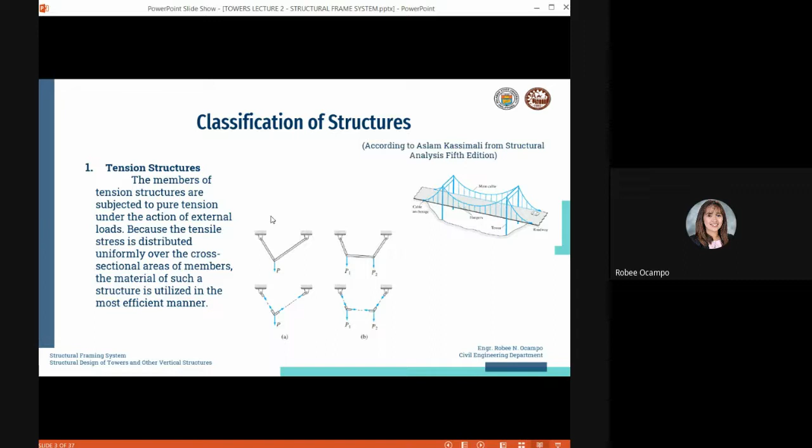So the first one is the tension structures. Next, we have the compression structures. Tension and compression structures differ in that compression structures develop mainly compressive stresses. So the difference is, one is for tension and the other is for compression. If tension structures have cables, the compression structures have arches.

The most common form of compression structures is the arch. If the cable develops tension in the structural member, the opposite is true for the arch. So whatever behavior the cable shows when it experiences tension, the opposite will be true for arches. But other than the arch, one of the most common examples of a compression structure is columns.

Columns are straight members that are subjected to compressive loads. Columns may also experience bending, or it may be combined bending and axial loading, but columns primarily behave as a compression structure, so they're mostly axial.

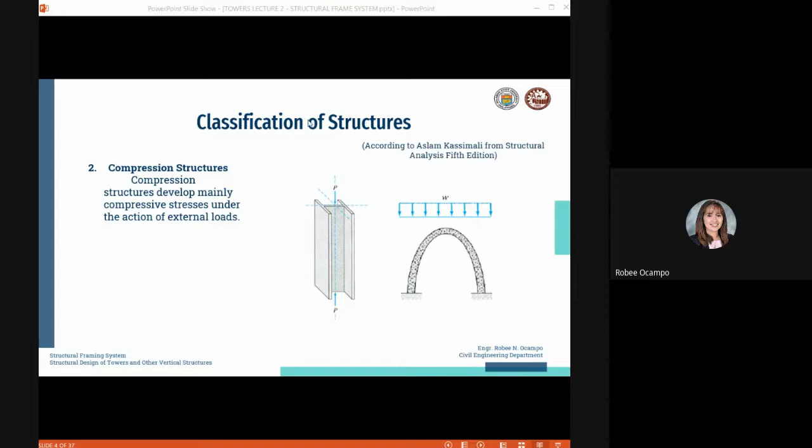Next, we have trusses. We're very familiar with the look or configuration of trusses. Trusses are composed of straight members connected at their ends by hinge connections to form a stable configuration.

Now, when loads are applied, for example P1, P2, P3, and P4, when the loads are applied to a truss only at the joints, its members either elongate or shorten. So they can experience tension and compression, but that's all a truss experiences. Thus, the members of an ideal truss are always either in uniform tension or in uniform compression. Real trusses are usually constructed by connecting members to gusset plates by bolted or welded connections.

Although rigid joints form cause some bending in the members of a truss when it's loaded, in most cases such secondary bending stresses are very small. The assumption of hinge joints yields satisfactory designs. Now trusses, because of their lightweight and high strength, since steel is usually used, are among the most commonly used types of structures.

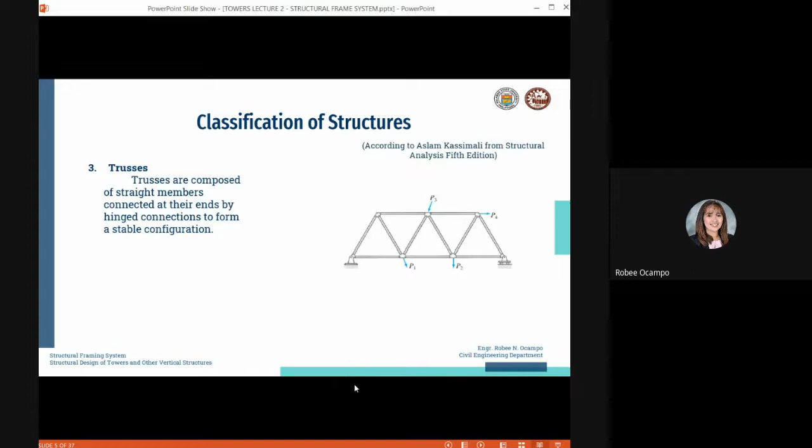Next, the fourth classification of structures are shear structures, such as RC shear walls. These are used in multi-story buildings to reduce lateral movements, maybe because of wind or earthquake excitations. So shear structures develop mainly in-plane shear with relatively small bending stresses under the action of external loads.

One of the most common forms of shear structures is of course shear walls. These are greatly used especially in tall buildings, because tall buildings are much more subjected to larger lateral loads like wind and earthquakes. As the building gets taller, the stronger its reaction to wind and earthquake.

So to resist those large lateral loads, tall buildings add shear walls to their buildings. This may be in the form of walls, or sometimes they use it as an elevator shaft, depending on the design.

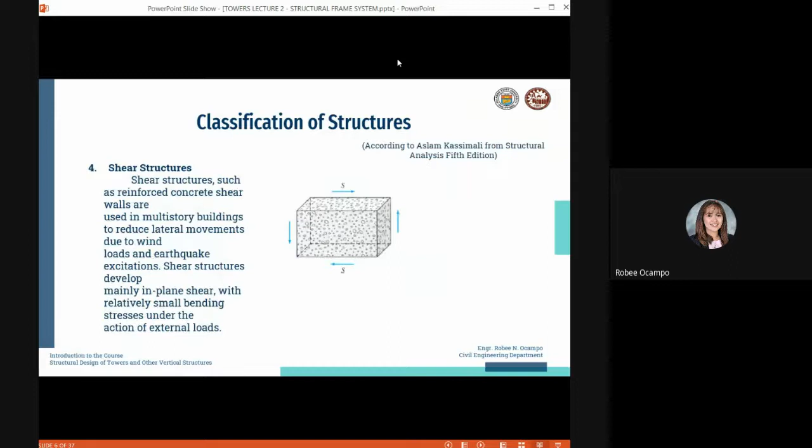So there is a fifth classification. Sorry, I haven't added that yet. Okay, the fifth classification according to Aslam Kassimali is the bending structure.

Bending structures develop mainly bending or flexural stresses under the action of external loads. In some structures, the shear stresses associated with changes in bending moments may also be significant and should be considered in their design.

The most common bending structure is of course a beam. We know that beams are structures greatly affected by flexure or bending. It may have axial loads, but these are almost negligible.

Aside from flexure, it also experiences shear because of the connections. Some of the forms of bending structures are rigid frames or moment frame systems. You also have slabs, which is also a flexural member. It acts like a beam, although it has a longer span, so it may also be considered a flexural member.

So some of the other commonly used structures are again beams, rigid frames, slabs, and plates. Unlike trusses, which are subjected only to joint loads, the external loads on frames may be applied on the members as well as the joints. In trusses, when we apply loads, it's directly on the joints because trusses don't really have bending. So the loads in trusses are at the joints only for it to experience actual load, either tension or compression. In bending structures, you can apply external load on the frame or beam within the member.

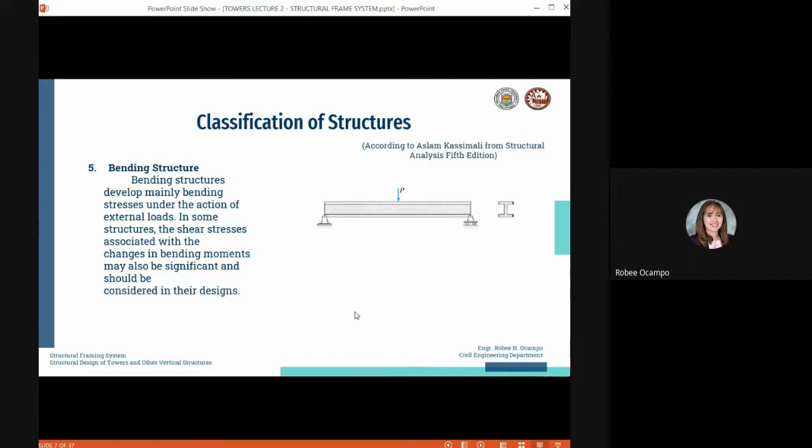So aside from these five classifications of structures according to Aslam Kassimali, I added another one, which is the surface structure. According to Hibbeler, aside from those four, the fifth is the surface structure.

When we say surface structure, this is a structure made of material having a very small thickness, while the other dimensions are very large compared to the thickness. Sometimes this material is very flexible and can take the form of a tent or an air-inflated structure. In both cases, the material acts as a membrane that is subjected to pure tension.

Now surface structures may also be made of rigid materials. Aside from, let's say, a thin steel plate, this could also be in the form of reinforced concrete.

As such, they may be shaped as folded plates, cylinders, or hyperbolic paraboloids, and are referred to as thin plates or shells. They act like a cable or arch since they support loads primarily in tension or compression with very little bending. In spite of this, plate or shell structures are generally difficult to analyze due to the three-dimensional geometry of their surface.

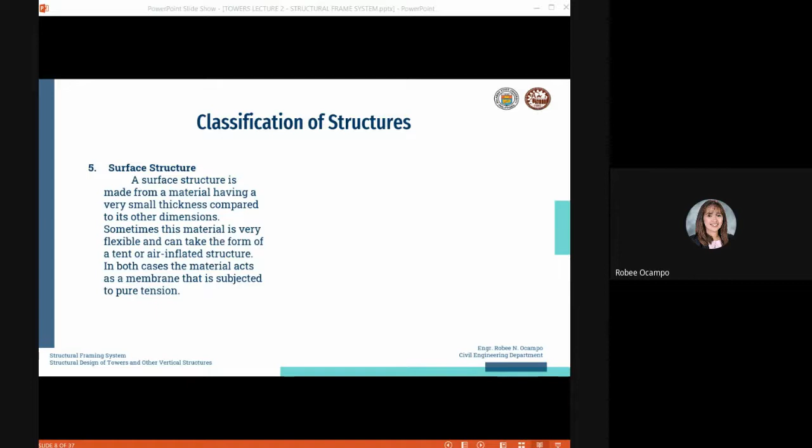So these are the basic classifications of structures, classified based on the primary stress they develop in their members. Now, because some structures are mainly governed by loadings due to lateral force, there is a framing system mainly used to resist lateral force. That's why we call them lateral force resisting frame systems.

Before we go on to the specific framing systems of towers and non-building structures, I also want to give you an idea, since I don't think some of you discussed the lateral force resisting frame systems. I would just want to give you an idea about this, though I think some of you already heard about these terms.

Now, the first main known lateral force resisting frame systems are shear walls. This is the most common form of a shear structure. A shear wall is a structural member that resists cracking through in-plane shear.

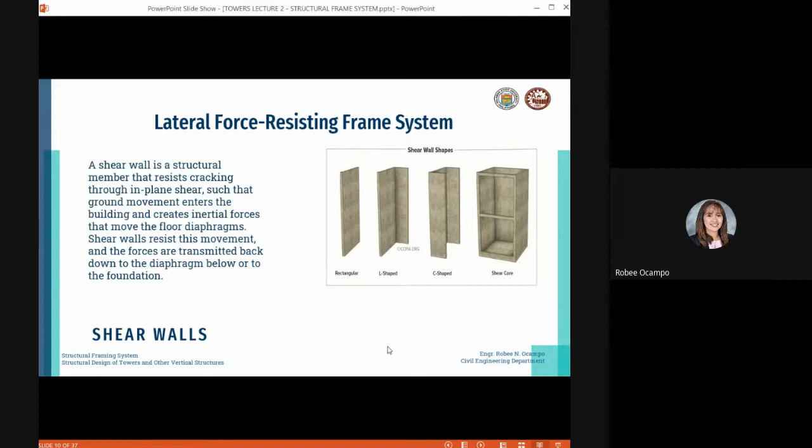Another lateral force resisting frame system is the moment frame. This is the very common and very traditional framing system, composed of vertical frames with traditional beams and columns.

For steel, they are connected by bolts or welds. For concrete, they are monolithic, meaning the pour is done together for the moment frame.

So they could have rigid connections. The rigid connection points permit the frame to resist lateral loads through the flexural or bending strength and the continuity of its beams and columns, such that moments are transferred from the beams to the columns at the connection points. A moment frame will not move laterally without bending the beams or the columns.

The three main types of connections, for steel, could be bolted or welded, and for concrete, it should be monolithic. When we say monolithic, it means the pour is done together—beam and column need to be poured at the same time for it to have a rigid connection.

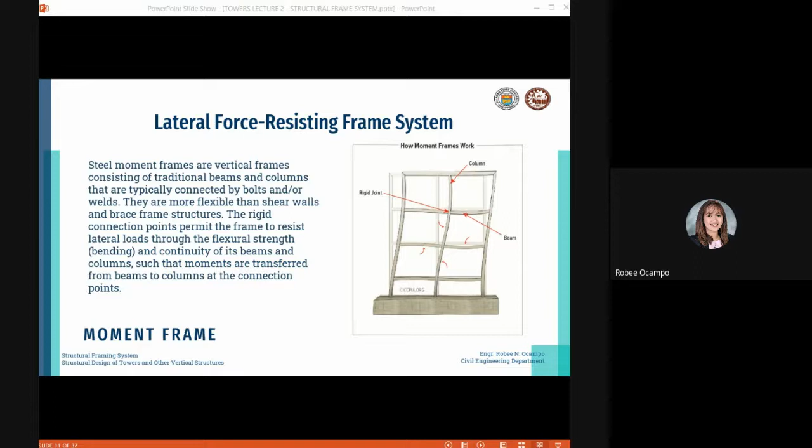Another one is the brace frame. Brace frames are most common in steel construction because they're easier to build in terms of connections. They could be in diagonal or triangulated steel beams or cables. Their purpose is to resist lateral force, and with a brace system, it could help resist larger lateral forces.

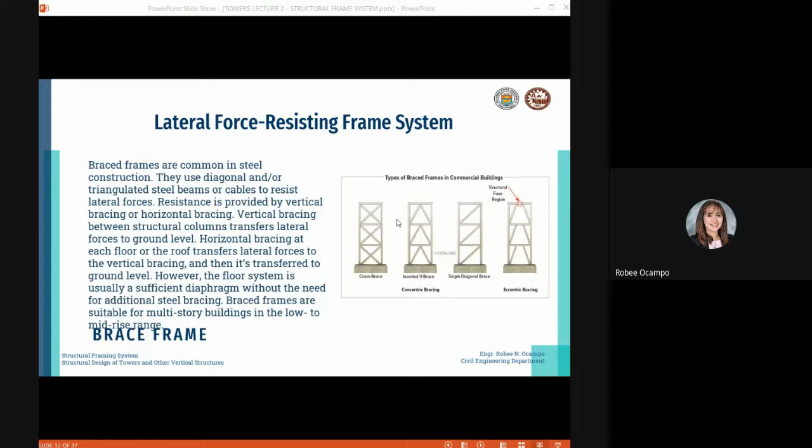Resistance is provided by vertical bracing and horizontal bracing. Vertical bracing is the bracing between structural columns, which transfers lateral forces to ground level. Horizontal bracing is at each floor or roof, transferring lateral forces to the vertical bracings. These are the most common types of brace frames in commercial buildings.

However, the floor system is usually a sufficient diaphragm without the need for additional steel bracing. Brace frames are suitable for multi-story buildings in the low to mid-rise range.

The main types of brace frames are concentric bracing and eccentric bracing. Concentric bracing is triangulated, forming a triangle—it behaves like a truss since it develops joints which act like a truss. We can only say a structure is a truss when the members form a triangulated connection. The most common type is cross brace, but you also have inverted V brace and single diagonal brace.

The other type is eccentric bracing. This utilizes diagonal braces with one or two ends deliberately offset from the supporting members. The offset is what we call the structural fuse region—the gap between the offset bracing—and it's designed to dissipate a lot of energy during an earthquake event.

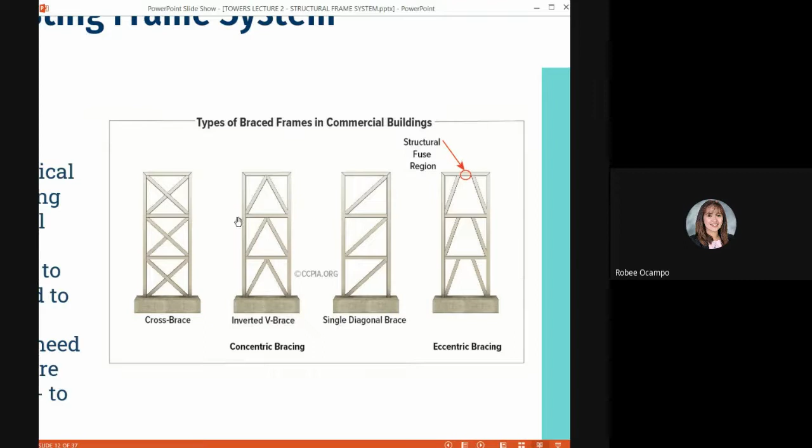Now let's go on to the types of towers. These towers are most commonly used for telecommunication towers, meteorological towers, and other sorts of towers for different purposes. These are the types of towers based on their structural actions: you have the self-supporting tower or lattice tower, and you have guyed towers, masts, or monopoles.

The most common, which you see wherever you go, is the self-supporting tower, also called a freestanding or lattice tower. Generally, its cross-section is a square, which has four legs. It could also have a triangular cross-section, which has three legs.

These towers act like cantilever trusses and are subjected mainly to wind and seismic loads. Freestanding towers are commonly used for TV, microwave transmissions, power transmissions, floodlight holding, and so on. These are usually used when the towers are quite tall.

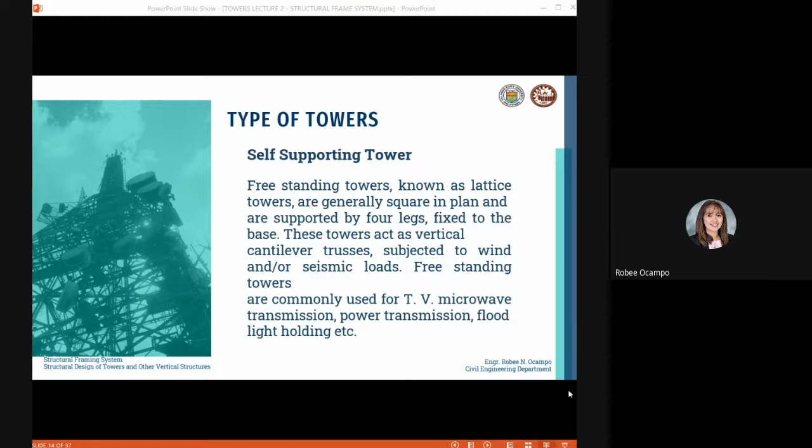Now, you have different kinds, or you have some common configurations with bracing systems.

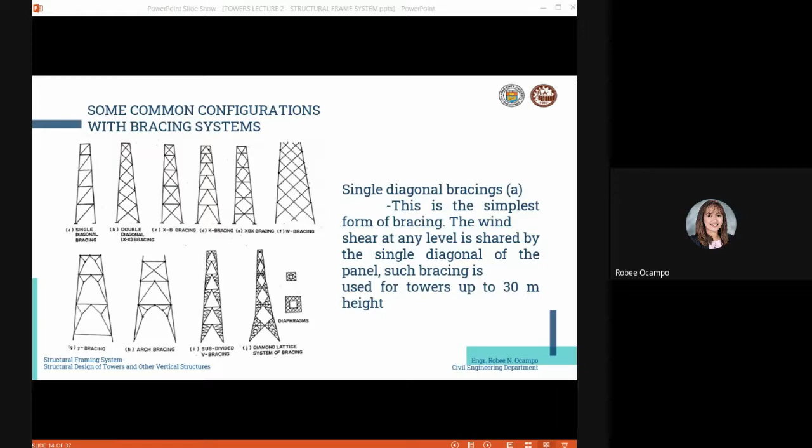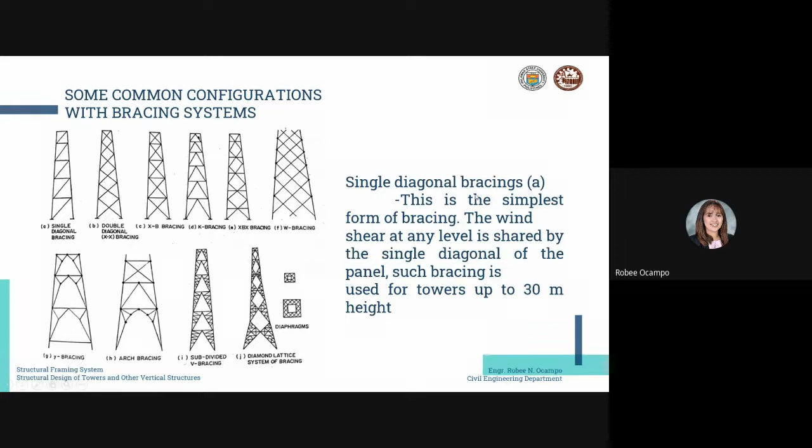The next one is the XX bracing or the double diagonal bracing. Ang pinagkaiba lang niya to sa isa, may additional na main diagonal, but this one has no horizontal bracing. So mas ginagamit siya sa mga towers na mas mataas, up to 50 meters height. This one and the first one are considered to be a statically determinate structure, so this could be computed using the basic equations.

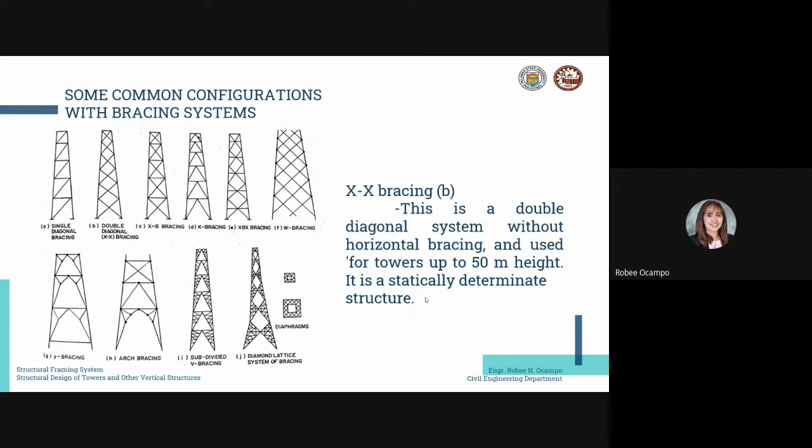The next one is the XB bracing. Pag sinabi natin XB bracing, meron kang double diagonal with horizontal bracings. Such bracings are quite rigid, so pwede siyang gamitin up to 50 meters height. But comparing to the second one, to the double diagonal, this XB bracing is statically indeterminate, so the horizontal members and redundant members can carry only nominal stresses.

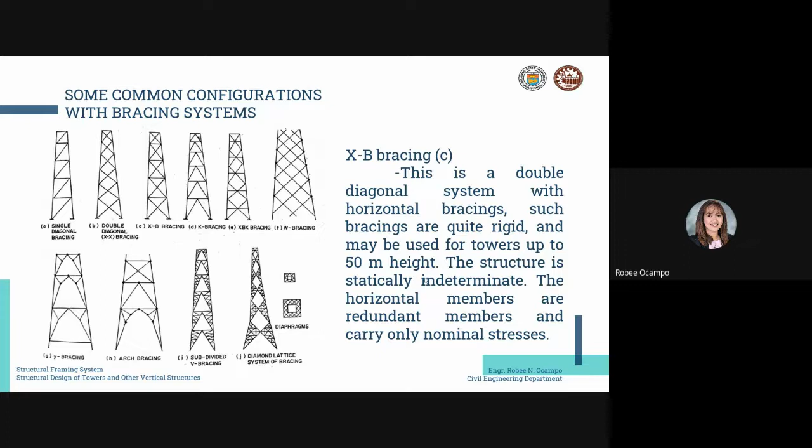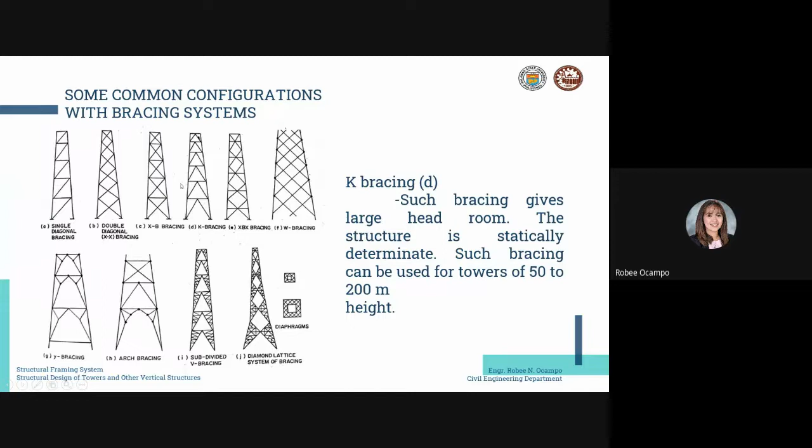The fourth one is the K bracing, the figure D. Such bracings give a large headroom. Again, this structure is statically determinate, like the first two, and this could be used for 50 meters up to 200 meters in height.

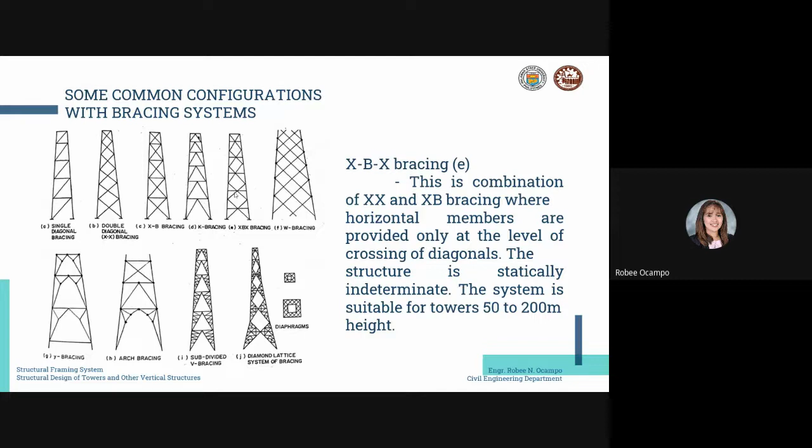Sa fifth naman, you have the XBX bracing. This is a combination of XX and XB, meron kang double diagonal na may horizontal, so meron kang horizontal and double diagonal. Although compared dito sa XB, iba yung configuration ng kanyang diagonals, na it has also crossing of diagonals. So this configuration is a statically indeterminate structure, pwede din siya to 50 up to 200 meters in height.

The next one is a W bracing. The system uses a number of overlapping diagonals. Compared to the first five, except the fourth one, mas marami yung overlapping ng structures nung diagonal members niya. Again, this is also statically indeterminate, but however, the effective length of the diagonals is reduced, so the system is quite rigid also, and this could be used for 50 to 200 meters of height.

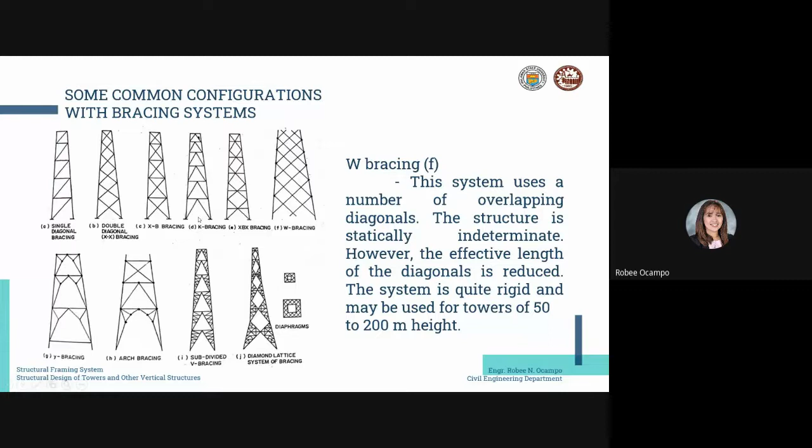Hindi ako masyadong nakakakita ng mga ganito klase, yung isa sa mga popular talaga is yung the first five. The next one is the Y bracing.

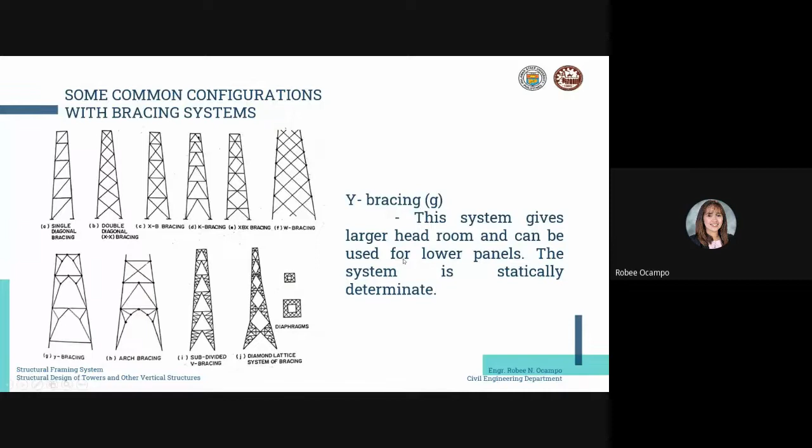Y bracing also gives a larger headroom and can be used for lower panels. This system is also considered to be statically determinate.

The next one is arch bracing. This is adapted for wider panels, has greater headroom, and the system is also called statically determinate.

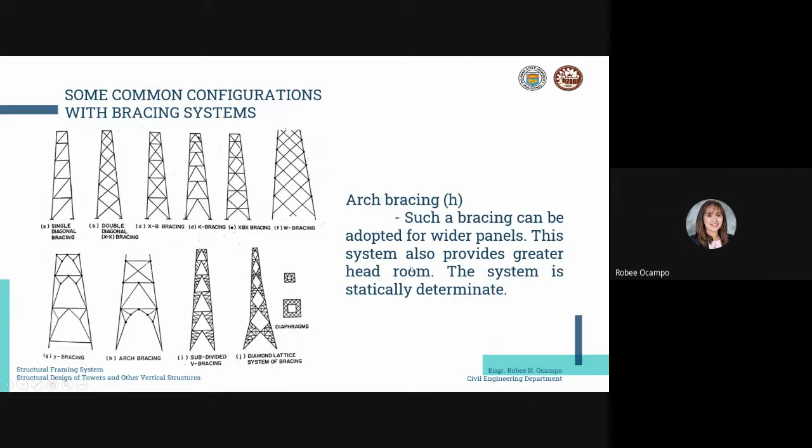The next one is subdivided V bracing. This is more used in tall communication system towers, like radio and TV towers, because they carry heavier loads. Aside from resisting lateral loads like wind and earthquake, they are also subjected to larger gravity loads from the antennas, like microwave antennas.

Antennas range from smaller sizes of 500 millimeters in diameter up to 3 meters in diameter. Of course, with larger diameter, they are also heavier. So if they are placed on towers, the ideal bracing for that is subdivided V bracing, which is why it's more used in communication towers, TV towers, and transmission towers.

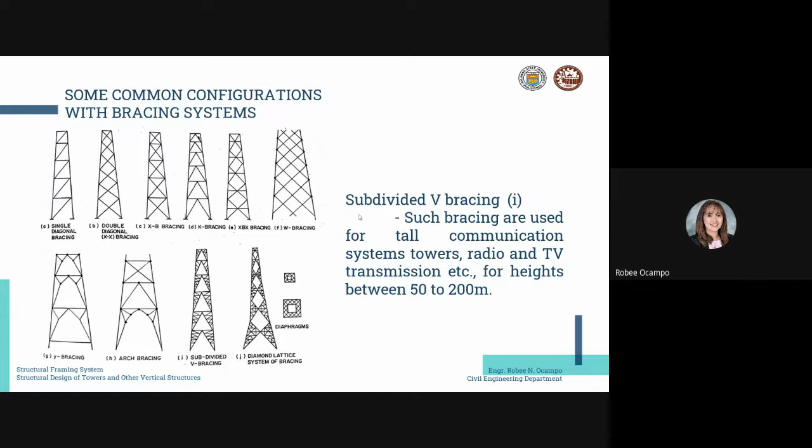Lastly, you have the diamond lattice system. The typical diamond lattice system is used for towers up to 100 to 200 meters in height. The base width is kept at 1/5 to 1/6 of the height, so it's more common in taller towers.

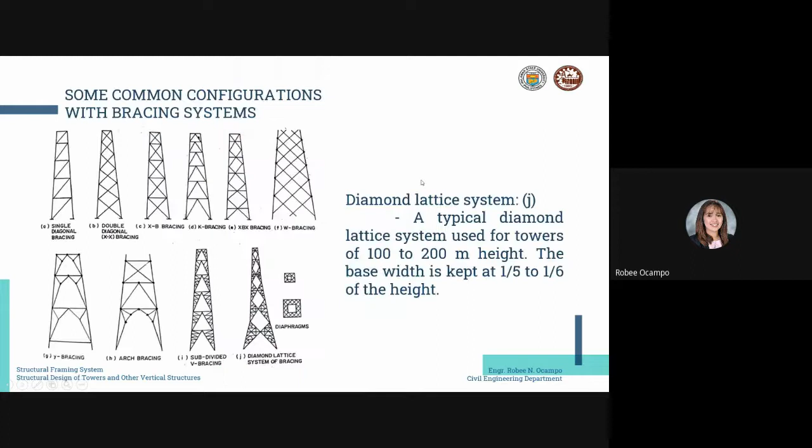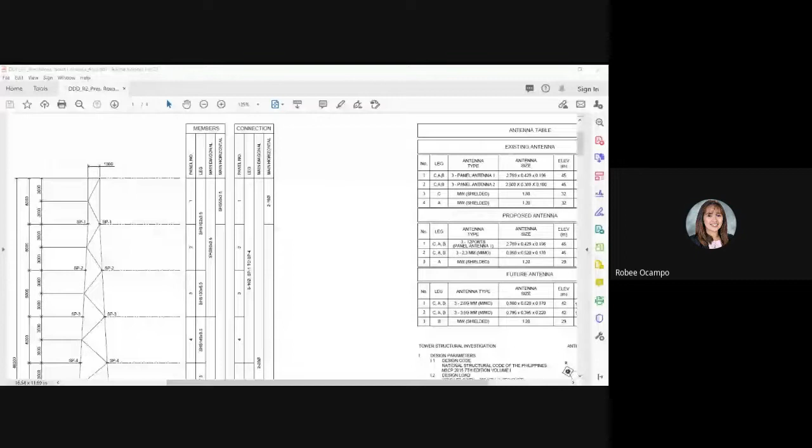I'm going to show you an example of a plan. This is an example of a plan by Smart, situated in North Cotabato, Roxas, North Cotabato. This is a 48-meter lattice tower.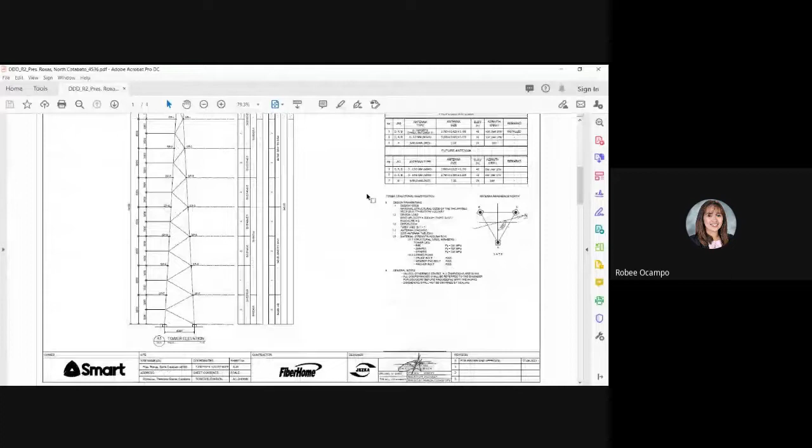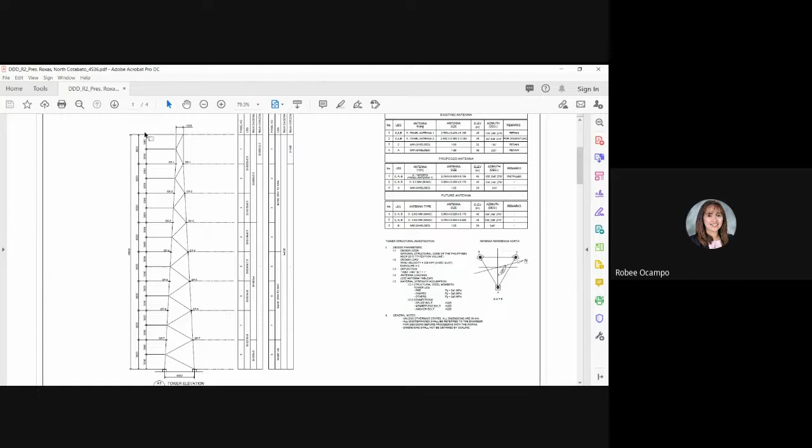The front part of the structural plans for towers is already the tower elevation. Beside the tower elevation, you also have the table of the steel members used. Aside from this, for the dimensions, you also have here the labels for its sections.

Earlier we mentioned the panel number. When we say panel, this is a group of members. It could have uniform height of panels, or the height of each panel could vary, depending also on the design of the structural engineer.

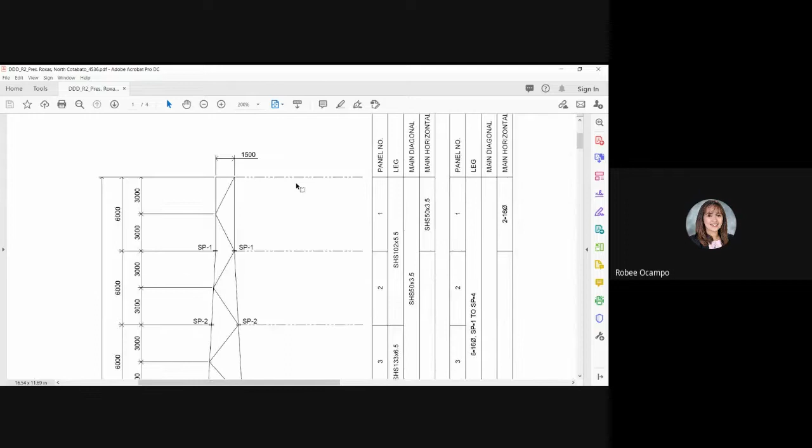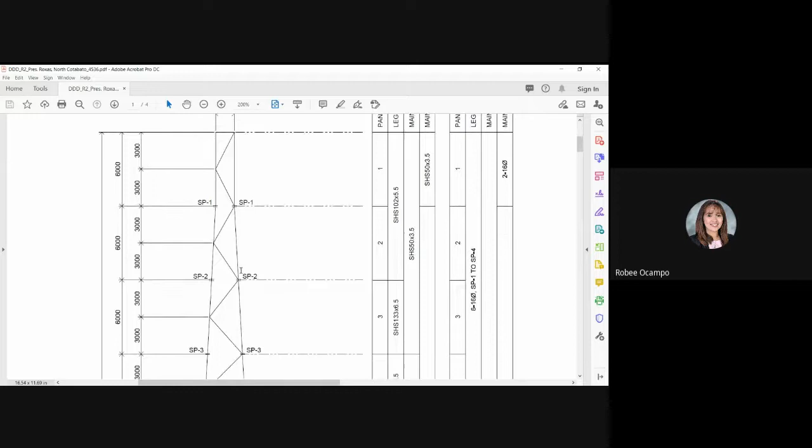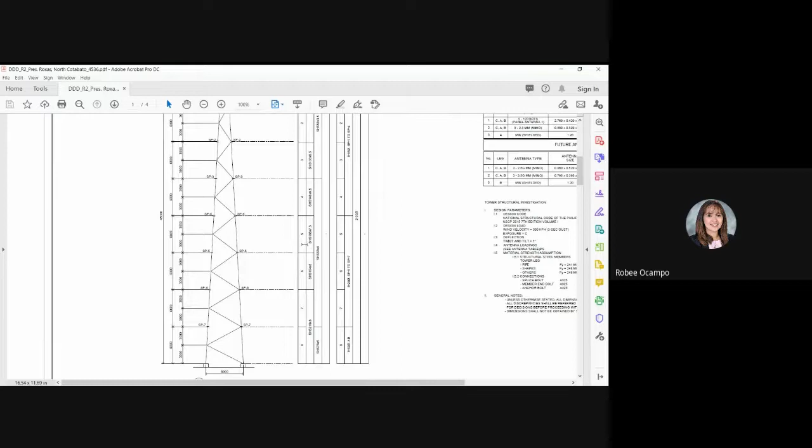I haven't mentioned earlier that usually, the design for bracing configurations is not strictly one bracing system or configuration. Usually it is a combination. So going up, you could have single diagonal bracing for the first fifteen meters, then going down, it could be different -- it could use subdivided V bracing or X-V bracing. It depends on the design.

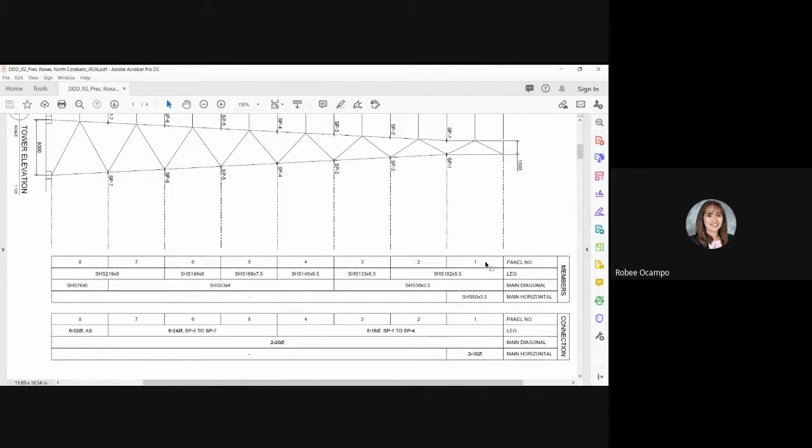Let me rotate this so you're not confused. Here in the table, you have the different panel numbers from 1 to 8, grouped accordingly. We also have what we call the 3 members: the leg, the main diagonal, and the horizontal member.

So the leg, of course, is this one -- it's on the side, I just can't highlight it. Oh, maybe I can highlight it. This one -- oh, it got highlighted. But anyway, can you see my cursor, my mouse? No? Okay, anyway.

So the leg that we call is this one. This is the main member -- it serves like a column in a building. This is the main member that distributes the load from the bracings and delivers the load to the foundation.

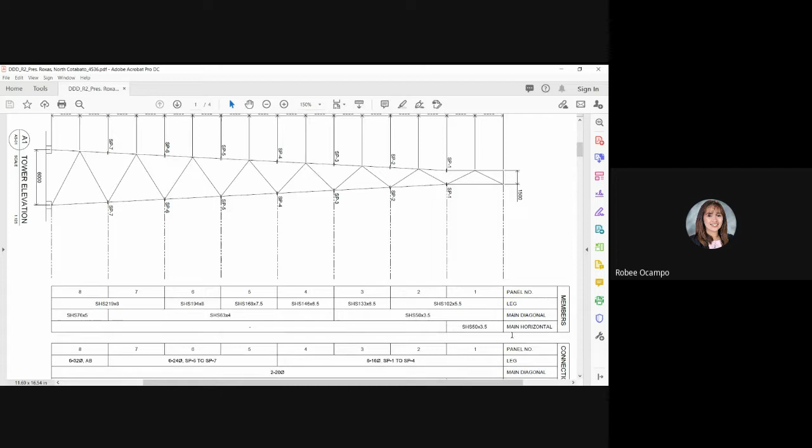We also have what we call the main diagonal -- of course, the diagonal members. These are what we call the main diagonal. And there are also main horizontal members.

Looking at this plan or tower elevation, only one main horizontal is written, in panel number 1. This is at the very top, at elevation 48 meters. Looking at the table, no other steel section is written for the other panels because there are no other horizontal members there.

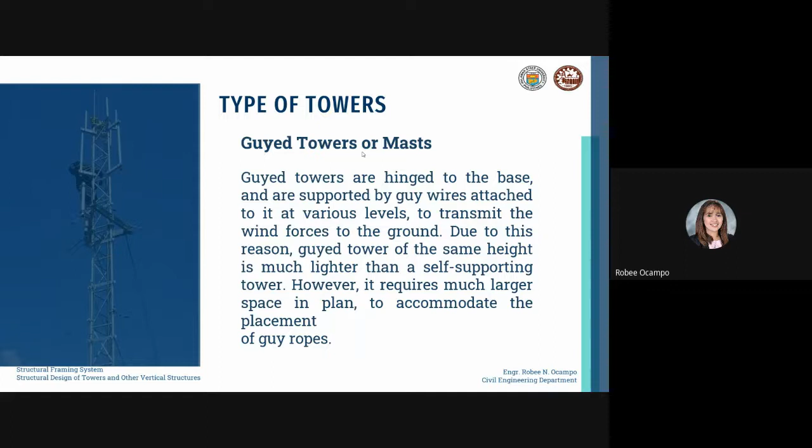Okay, so pag sinabi nating mast, it is like a column, but it is in the form of a truss. It is situated with truss members, like this one on the picture. So this is a guyed mast.

Pag sinabi natin guyed mast, usually ang cross section could be triangular or square, pero pinaka common na cross section ng mast is triangle. Pag towers naman, pag sinabi natin guyed towers, this could be a single member, or pwedeng kumbaga like for example a tubular tower lang siya, with guy wires. This could also be called a guyed tower. So any tower that is supported by guy wires is what we call a guyed tower or guyed mast.

So the common parts of guyed mast are, of course, the foundation. So meron kang steel mast, ito yung mast or yung tower, pinaka main tower niya. This could be a pole or a mast, and it is assumed to be a pin connected, so it generally has a pin foot.

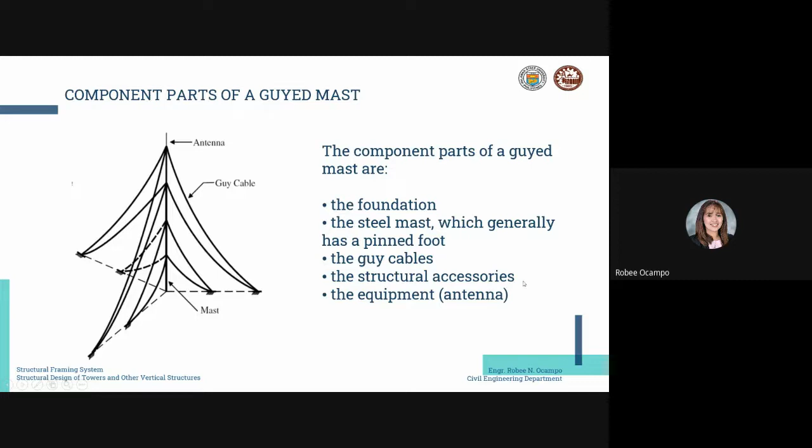Okay, now you also have guy cables, the main component. Kaya nga siya tinatawag na guyed mast o guyed towers because of the guy cables. Aside from the guy cables, you also have structural accessories like the connection or bolted connections, or different appurtenances, and of course the equipment or the antenna, yung pinaka gravity load aside from the self weight ng ating towers. So this is an example of a structural detail for steel mast.

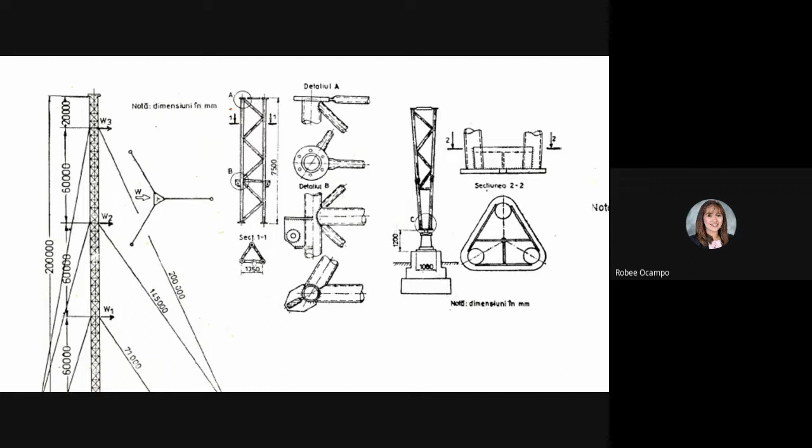Makikita nyo, again, sabi ko nga kanina, isa sa mga common cross section niya is a triangle, di ba? So you have here the cross section of your mast. So this is the main horizontal member of the mast. And looking at the elevations, this has also main diagonal, that's why it also acts like a truss.

So for this sample of guyed tower, you have guy cables or guy wires situated in different or various levels of the tower. You have guy wires connected every 60 meters of the tower. The total elevation of the tower is 200 meters. So for every 60 meters, there's a connected guy wire.

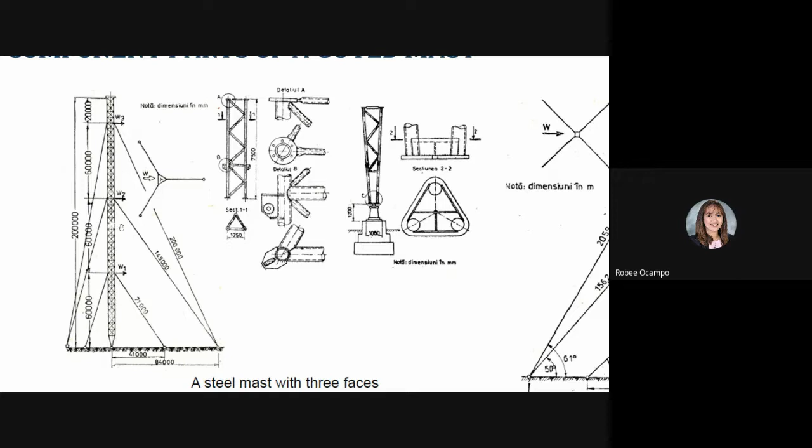The guy wires are placed in 3 directions - one in front, one on the side, and one in the back. For the connection, usually one of the common methods is bolts or weld, or it could be a combination of bolts and weld connections.

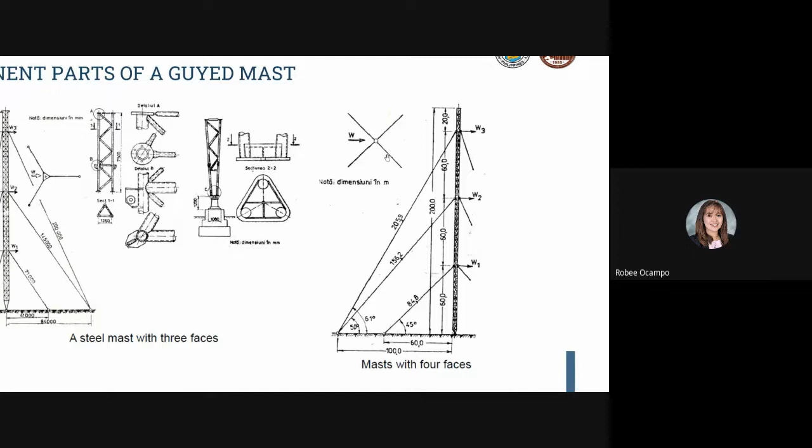Aside from 3 directions of guy wires, some have 4 faces or 4 directions of guy wires, like an X shape - northwest, northeast, southwest, and southeast. This depends on the design, usually depending on the governing direction of the wind.

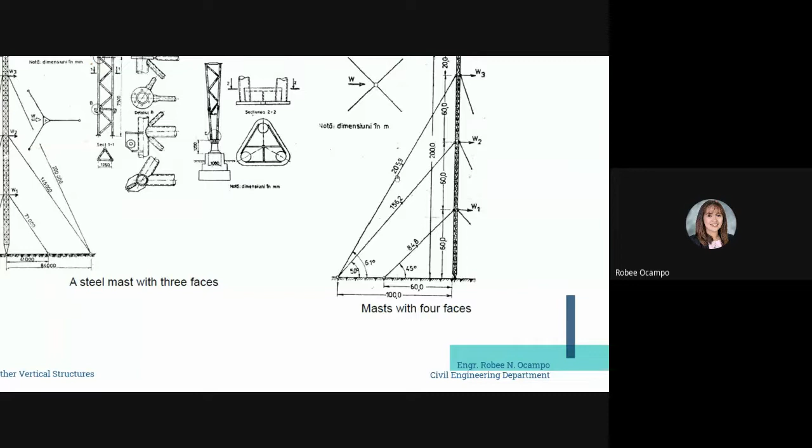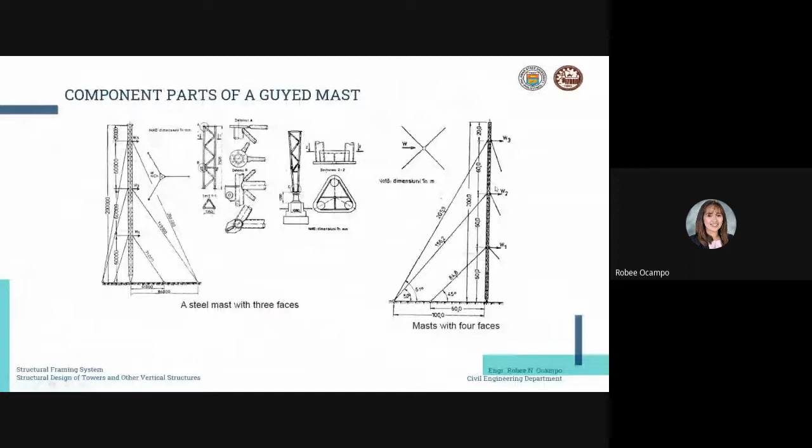Again, like in this figure, the second tower is connected with guy wires for every 60 meters. These are the typical details - here you have the cable, and this is the gusset plate.

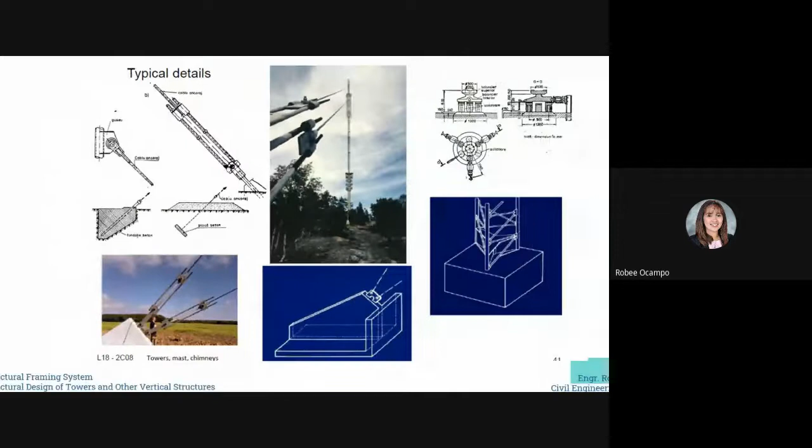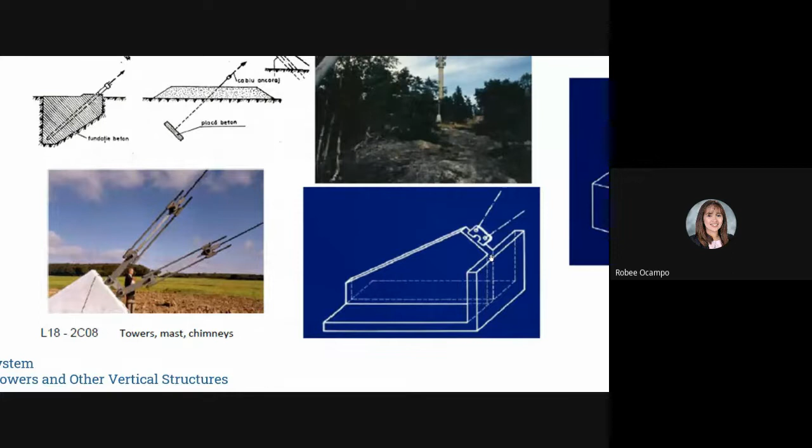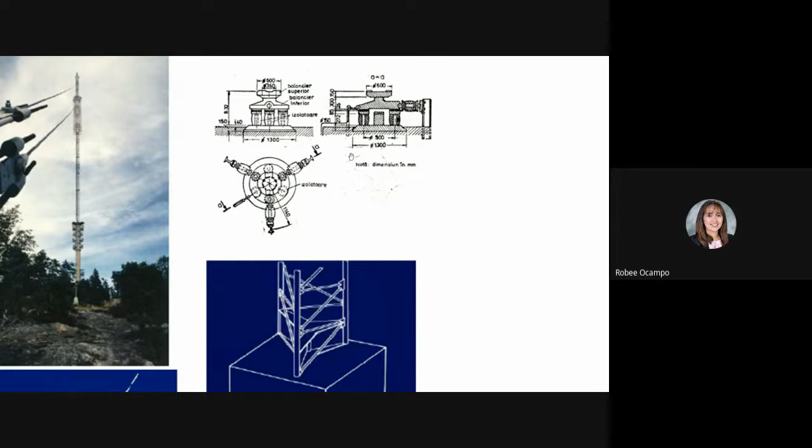These guy wires are pre-stressed, meaning loaded with pre-tension. That's why when you design guy wires, you need to know the pre-tension force to use when constructing them. There are also different configurations according to the structure.

You have solid structure, truss structure, and variable section. For solid structure, it's made of tubes or tubular sections - these are the guyed towers. This is commonly connected with guy wires in 3 directions, with a connection every 120 degrees.

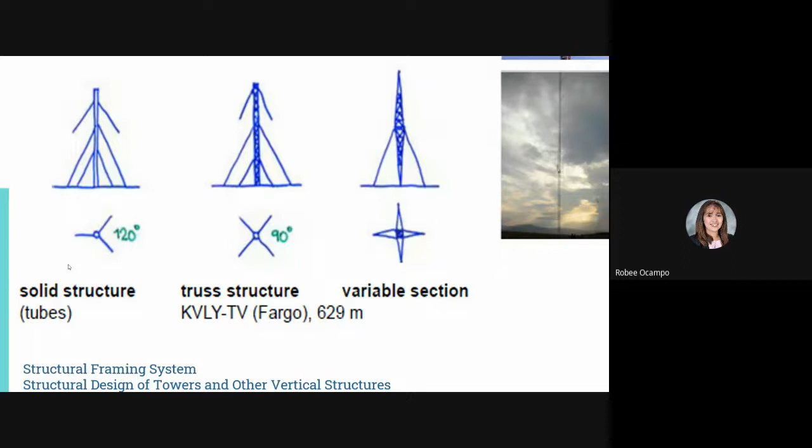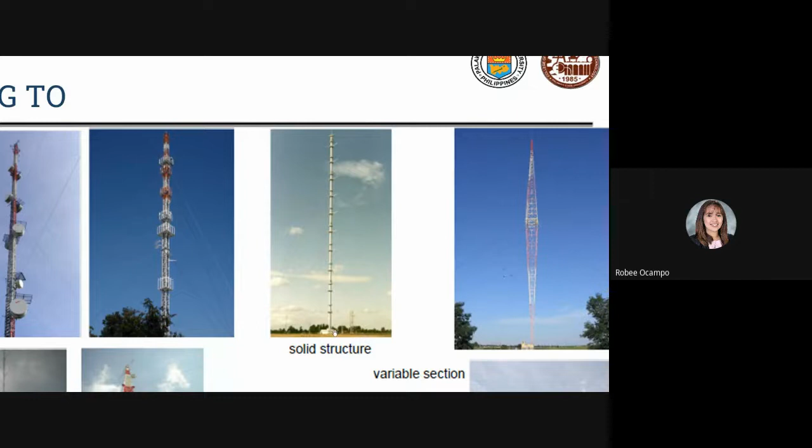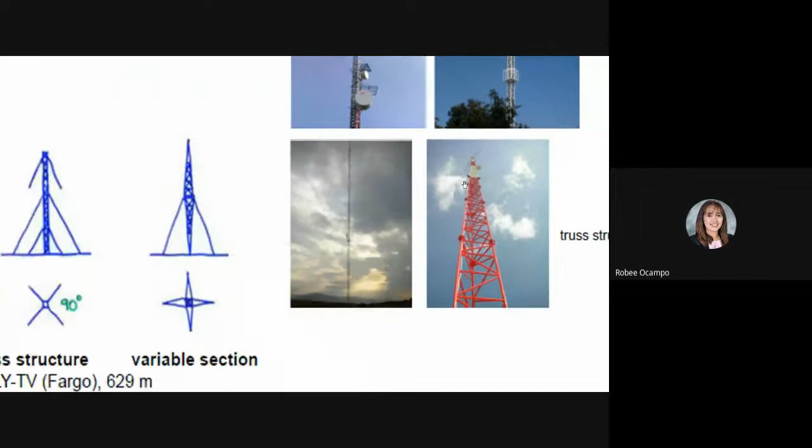So this is an example - this one is a solid structure made up of structural steel tubular sections, with sections 1, 2, and 3. The next one is the truss structure.

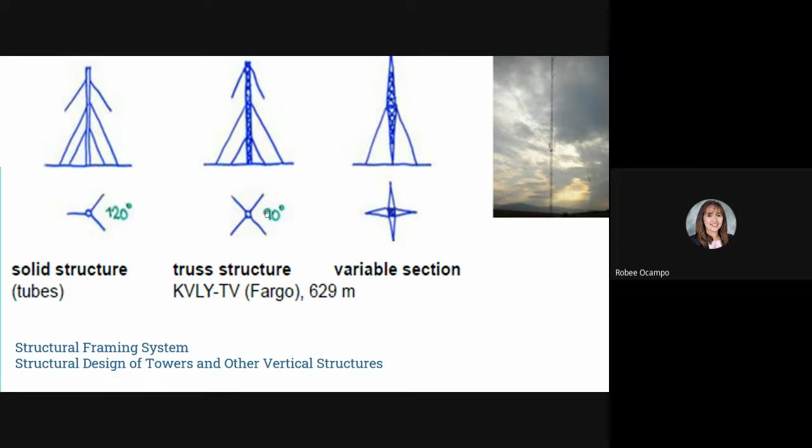These are the guyed masts. It usually has guy wires connected in 4 directions, for every 90 degrees. So for every 90 degrees there is a guy wire connected to the mast.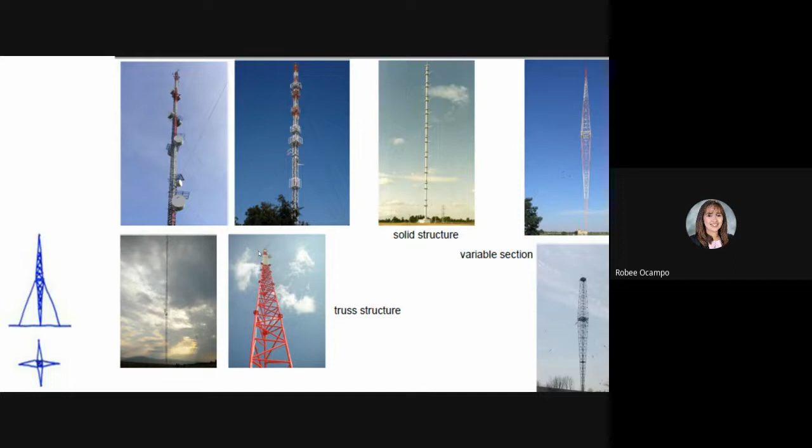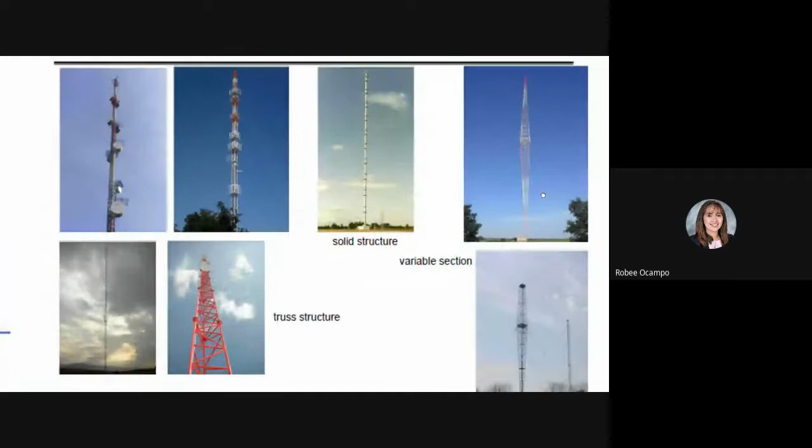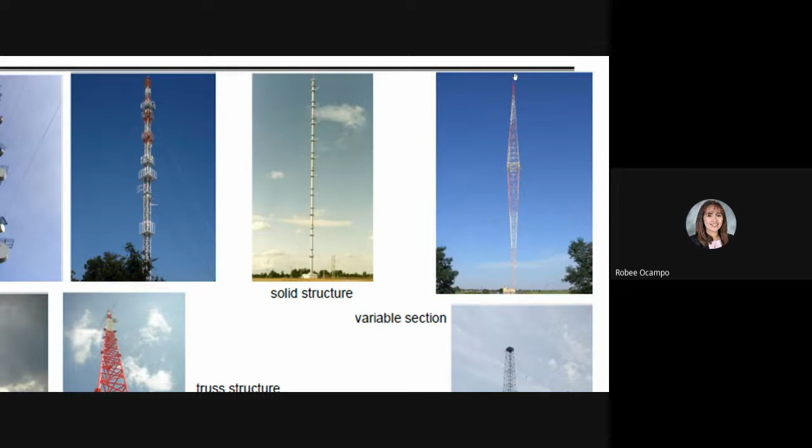Aside from solid structure and truss structure, you also have variable sections. When we say variable section, the cross-section varies or tapers, comparing from the top of the tower down to near the foundation. For this example, at the very top of the tower, the cross-section is small, almost a point. As you go down to the foundation, the cross-section becomes larger.

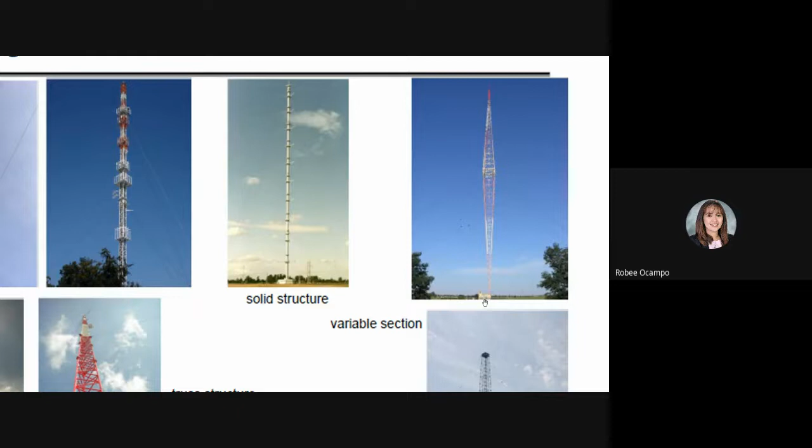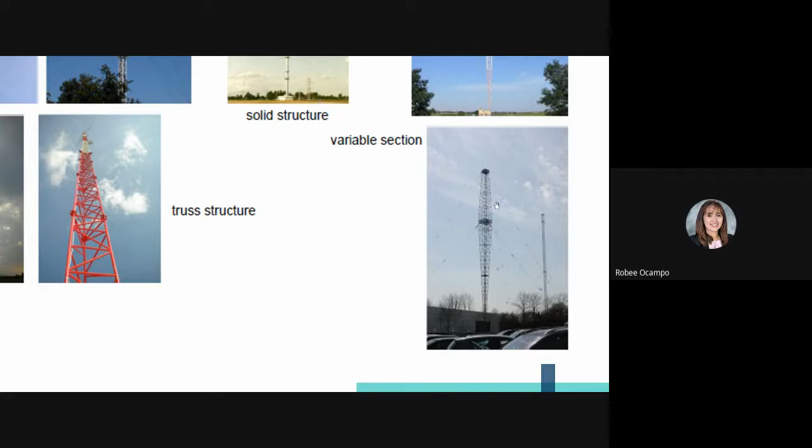Then toward the middle, up to the lower part, it becomes smaller again. And for the figure below, at the top you have a square cross-section, but as it goes down, it becomes smaller and smaller. So these are the different configurations of guyed masts or towers according to their structure.

And lastly, you have the monopole. A monopole is a single self-supporting pole. Usually, this is used on roof decks or high-rise buildings. This is commonly used by telecommunication companies in Metro Manila because of the lack of land area where lattice towers could be built. They use monopoles, placed above roof decks of mid to high-rise buildings.

The usual setup is, for example, if I have a commercial building and a telecommunication company like Smart or Globe wants to place a tower in the area to enhance the signal, as the building owner, I would rent out the space to them for their tower. So usually on roof decks, what is installed is a monopole.

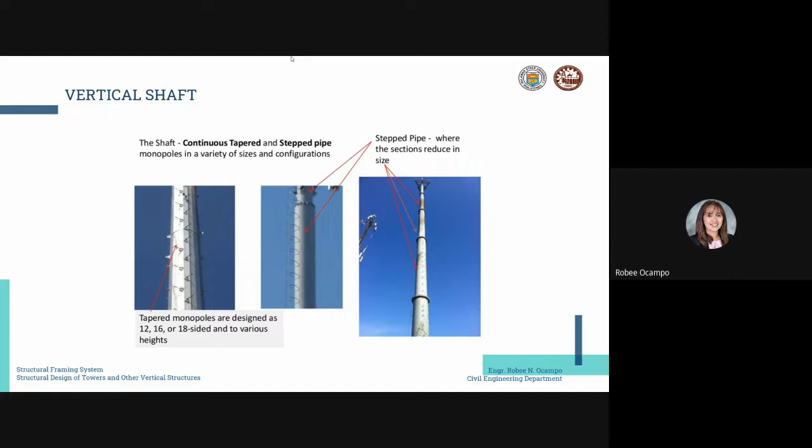Depending on the design, if allowed based on your calculation, you could use a smaller cross section for the remaining length - it could use a different, smaller size of cross section for the steel pipe. That's the difference between tapered and stepped pipe.

Another common tower type is what we call transmission line towers. These support extra high voltage electric transmission lines. Because they carry heavy currents, they need to be placed at higher levels compared to the ground. That's why when you travel going south, you'll notice the transmission line towers are quite tall.

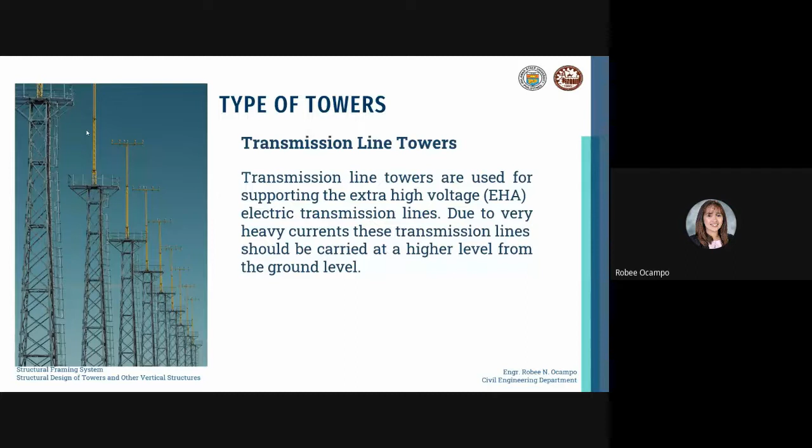Aside from having a higher height of its own, the tower is also often located or placed in higher areas, like in the mountains, because it carries extra high voltages.

For transmission line towers, you also have different configurations with bracing systems, almost similar to the configurations we mentioned earlier. You also have double diagonals, and you can see double diagonals and X bracings here. Aside from self-supporting, you also have lattice or guyed wire types. So it's very much the same, or not exactly the same, but similar.

It uses almost the same configuration as other general lattice towers, and it could be a combination of guyed wires or guyed towers and lattice towers.

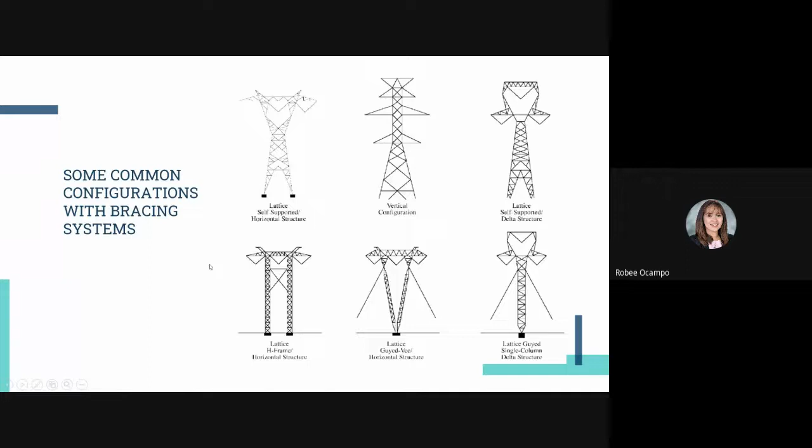For further classification of towers, first you have the basis of the standard shape of the parent material - meaning the main shape of the steel. For monopoles, what is mainly used is a circular shape, or what we call a steel pipe. Because the height of monopoles is small, we could use one of the common steel sections, which is the steel pipe.

Also, the placement - since monopoles are commonly used for telecommunication - the placing of antennas is circular around the pole. So it's better to use a circular steel section for your monopole.

Now for poles, other than monopoles, as I mentioned earlier, aside from a single pole, there are also poles that use legs - these may be three-legged or four-legged poles.

Aside from that, you can also use tubular or hybrid. But more common here, what's used is circular or circular shape steel pipe.

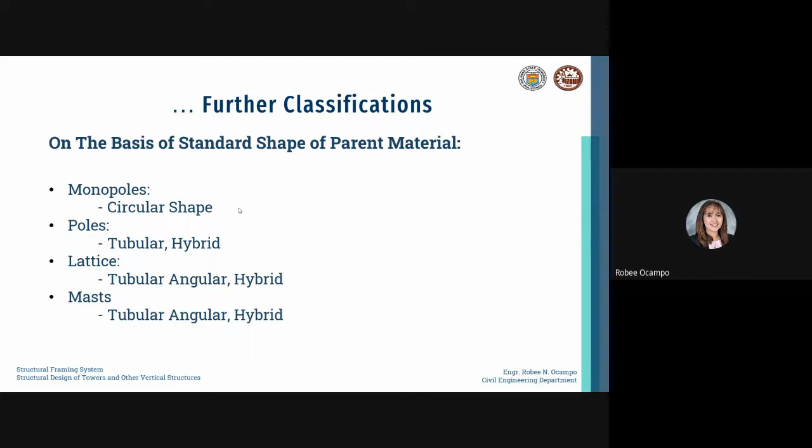For lattice or mast, it could be tubular steel tubing, angular, or hybrid. For hybrid, if it requires a larger steel section, usually what's used is a WT section or a W section. So either of the three, we may have tubular, angular, and hybrid for both lattice and mast.

Another classification is based on the legs of the tower. For a monopole, of course, there's no leg, it's single, so you don't have a classification for that. For a pole, it could be braced or unbraced - two-legged or three-legged, as I mentioned earlier. There's even four-legged.

It depends. For lattice and mast, you have three-legged, meaning triangular is the cross-section of the towers, or when you look at the cross-section of every panel, the most common cross-section is triangle for three-legged lattice or mast towers. For four-legged, for all the panels, the cross-section is of course square or rectangle. But for lattice and mast, the cross-section is really square.

Usually, the distance from one leg to another is equal or uniform. It doesn't use rectangular - it's always square cross-section for four-legged towers.

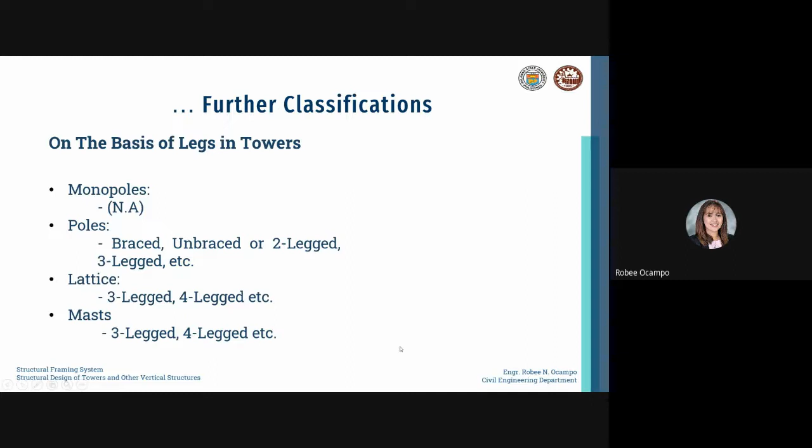The last classification is based on the placement of the structure. You have ground-based structures which have their own foundation. If it's a lattice tower and it's ground based, you have a mat foundation or isolated footing, depending on the design or the height. But as it gets taller, it caters to a greater amount of lateral load, so it supports greater load.

So it needs a bigger foundation. As it gets taller, a mat foundation is used. And if you have a guyed mast, aside from the foundation of your mast or tower, you also need support for your guy wires situated in different directions.

For rooftop placement, you also have another classification based on placement. You have the rooftop type - as I mentioned, this is often used on roof decks, commonly used in Manila.

Usually it uses monopole or pole towers with three-legged or four-legged configurations. Sometimes, for taller buildings, you'll also see guyed masts or guyed towers.